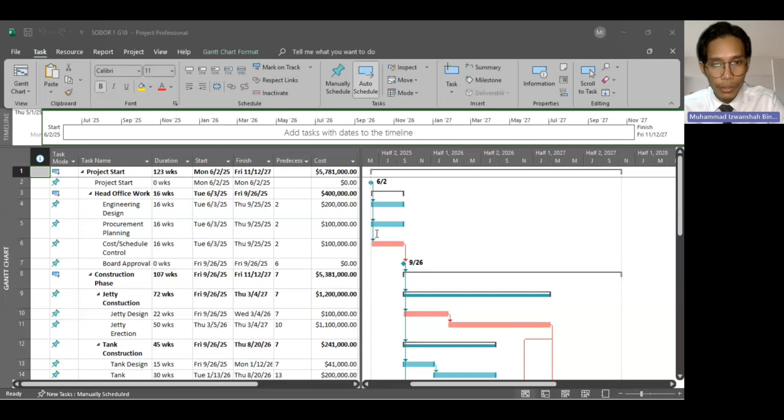The oil depot will be built near Creek Ronan, a location chosen for its deep water sea lane, which allows easy passage for the tanker. The depot will include 3 terminals for loading petroleum products onto road tankers, with separate facilities for premium petrol, regular petrol, and diesel.

Key components of the project include constructing a jetty, installing unloading arms, building storage tanks, and setting up a control room with computer facilities. We will also ensure the depot has all necessary safety equipment and a standby diesel generator for emergencies.

Our project plan will evolve over the coming weeks as we receive more detailed information on timescales and costs from suppliers. Initially, we will focus on creating a work breakdown structure and an outline logic network plan using MS Project. We will also evaluate vendors and confirm our project purchasing strategy. Our goal is to produce a comprehensive project proposal report that summarizes the schedule, cost, and any challenges we face.

So for Sodor 1, I'll be explaining. The total weeks that we get for Sodor 1 is 123 weeks. It's quite long, and this is our planning for the project.

The project will start on the first Monday of June 2025, which is 2 June 2025. It will start with head office works, then continue with the construction phase. In this construction phase, we will have jetty construction, tank construction, civil works, and mechanical and electrical work, then piping works, continuing with firefighting, safety equipment, and painting work.

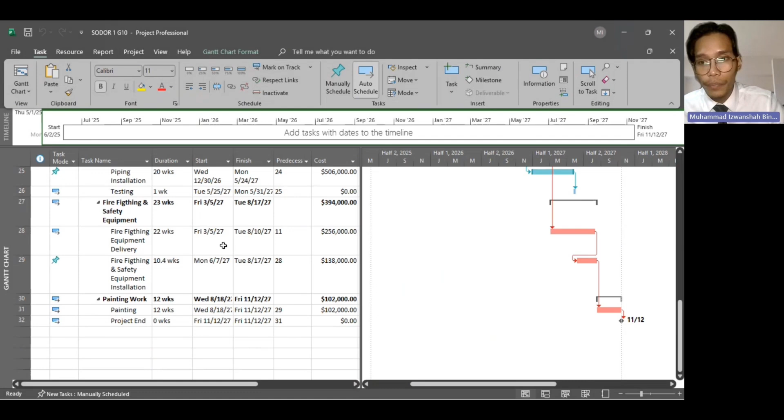This project will end on 12th November 2027. This is just the initial cost for our project. The total cost of our project is 5,781,000 pounds.

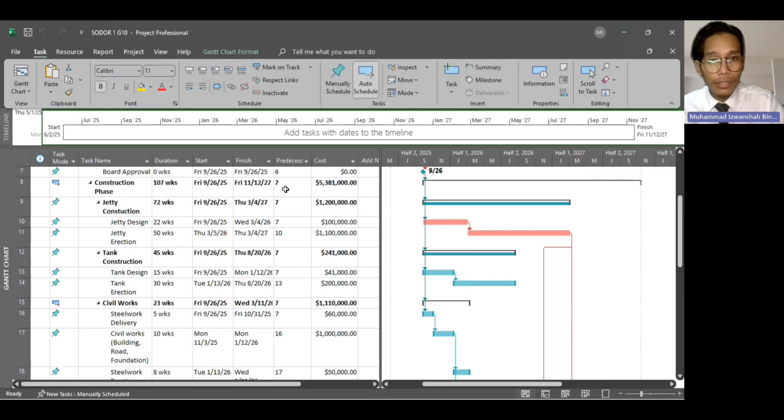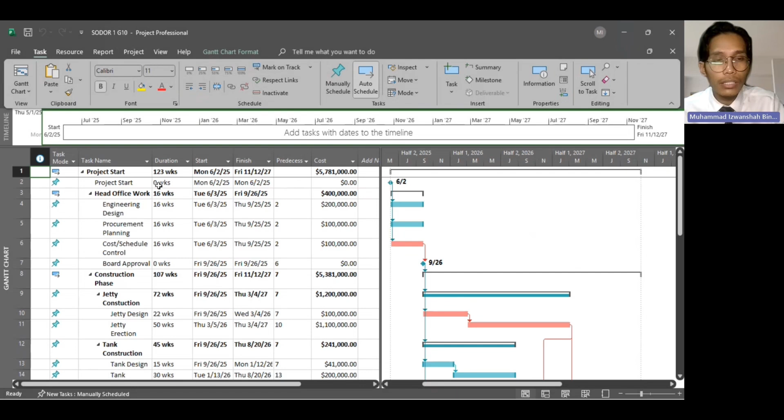The total cost is 5,781,000 for the total cost for Sodor 1. This is just a start for our Sodor project. I think that's all from me, and I will pass to Daniel for Sodor 2. That's all from me, thank you.

Thank you, Izwanshah, for your presentation earlier. My name is Daniel, I will continue with the Sodor 2 project case study, which is focusing on vendor selection, contractor evaluation, and resource management, which were all pivotal in ensuring the project's success.

The vendor selection process was systematic and based on 4 key criteria: price, delivery time, vendor rating, and geographical proximity. Each vendor was scored on these factors to ensure a balanced approach. For instance, Mitsui from Japan was chosen for pipes and fittings due to their cost efficiency and moderate delivery time of 19 weeks. Despite a vendor rating of 2, adjustments were made to account for delays, ensuring the project schedule remained intact. Stockist A from the UK was selected for instrumentation because of their excellent vendor rating of 4, outweighing their slightly higher costs.

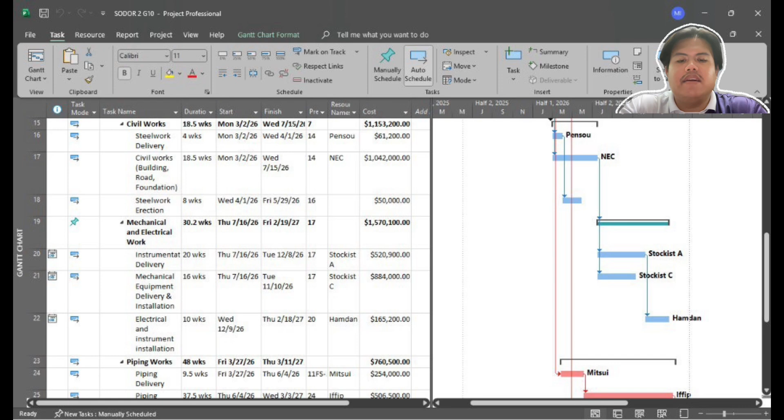Second, contractor evaluation. Contractors were also evaluated using a similar methodology. Key examples include Tankage CM12 from France, which was selected due to their top-tier rating of 4, reasonable cost, and manageable design and erection times.

JT-CCC from Greece was chosen for their competitive pricing. Despite a lower rating of 2, adjustments were made to account for potential delays, extending their erection time to 39 weeks. To maintain the overall 94.8-week project deadline, overtime was incorporated into critical tasks with additional costs and schedules carefully adjusted.

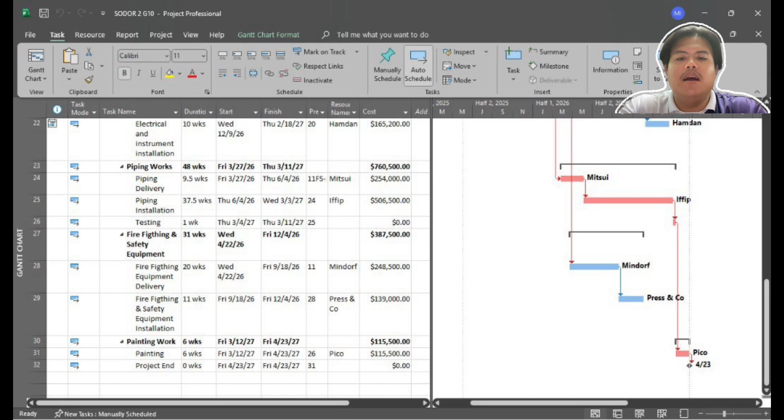Resource management. Effective resource management was critical for the project's success. For example, high priority tasks like piping installation required 3,000 hours of work and 1,500 hours of overtime to mitigate delays. Transparent documentation of overtime and vendor decisions ensured accountability and provided a reference for future projects.

In conclusion, the Sodor 2 project exemplifies how a structured approach to vendor and contractor selection, combined with effective resource management, can lead to the successful execution of complex projects. This process not only ensures quality and timeliness, but also establishes a strong foundation for future initiatives.

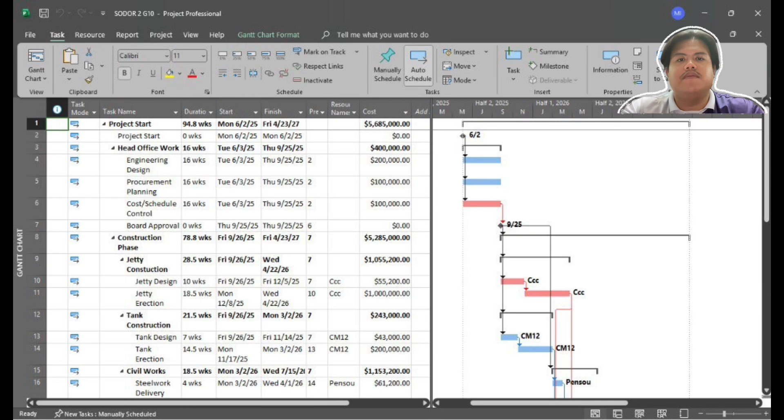To keep the project on track, the project plan and cost model were updated based on new information from the purchasing and procurement department, ensuring better accuracy and efficiency.

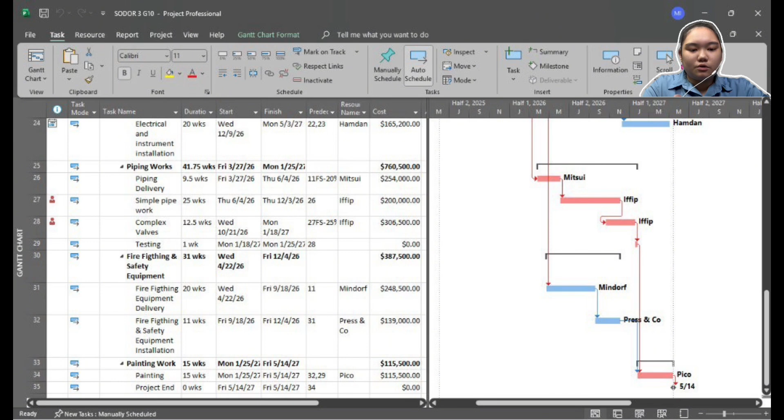Iffip Japan was selected for the installation of plumbing and piping equipment due to their expertise, with the works optimized to reduce the simple piping installation time from 50 weeks to 25 weeks, and the complex piping from 25 weeks to 12.5 weeks.

Next, NEC Spirus was chosen to handle civil works such as building tank foundations and structures, aiming to complete these tasks in 98 weeks without excessive overtime, thus saving and reducing costs.

The allocation of work hours and overtime was carefully planned, with overtime used strategically to keep the project on schedule without compromising quality.

The revised project plan improved time and budget management, ensuring the project progressed smoothly.

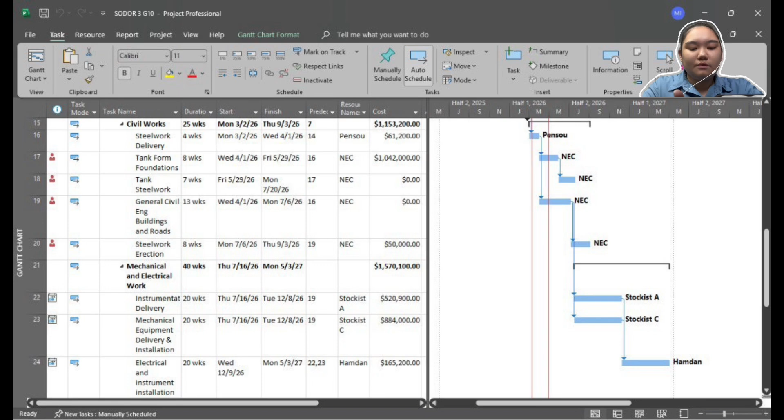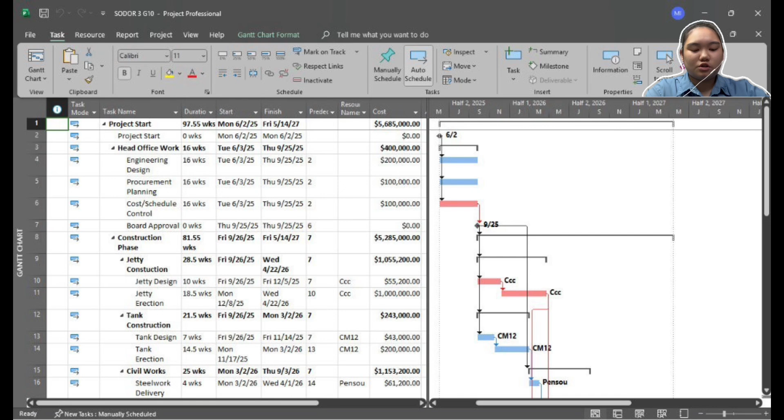To summarize, the revised project plan and cost model give us a more accurate and efficient approach to managing the timeline and budget. Choosing Iffip Japan and NEC Spirus is therefore part of our strategy to improve the efficiency of resource use without sacrificing quality. Adding overtime now helps refine further works to ensure that the overall work proceeds according to schedule and budget.

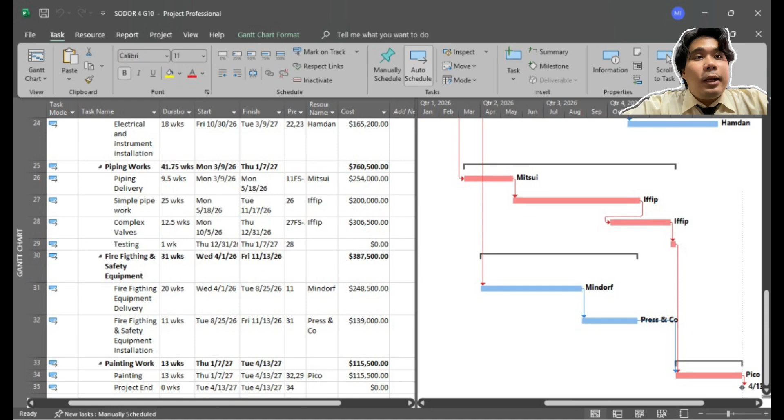In Sodor 5, currently it is week 45 on the project. There have been some changes in the material delivery schedule and project timeline. First is electrical delivery. Our vendor is Stockist A with a rating of 4. The delivery time has been reduced by 5 weeks, from 20 weeks to 15 weeks.

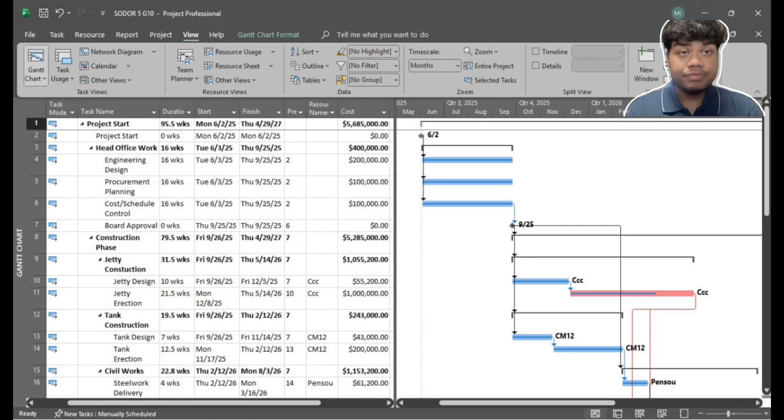Second is mechanical delivery. Our vendor is Stockist C with a rating of 4. Delivery time has also been reduced by 5 weeks, from 20 weeks to 15 weeks.

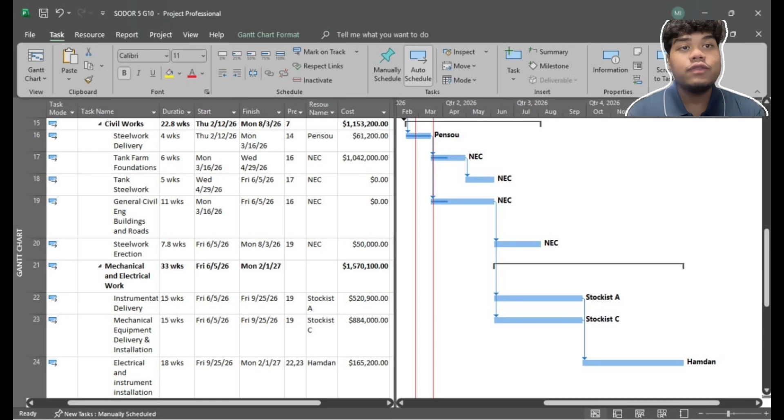Third is piping delivery. Our vendor is Mitsui with a rating of 2, and the delivery time has increased by 2 weeks, from 9.5 weeks to 11.5 weeks. In Sodor 5, there are also changes about the jetty erection activity. The contractor for this activity is CCC with a rating of 2, and unfortunately there has been a delay of 6 weeks, extending the completion time from 15.5 weeks to 21.5 weeks.

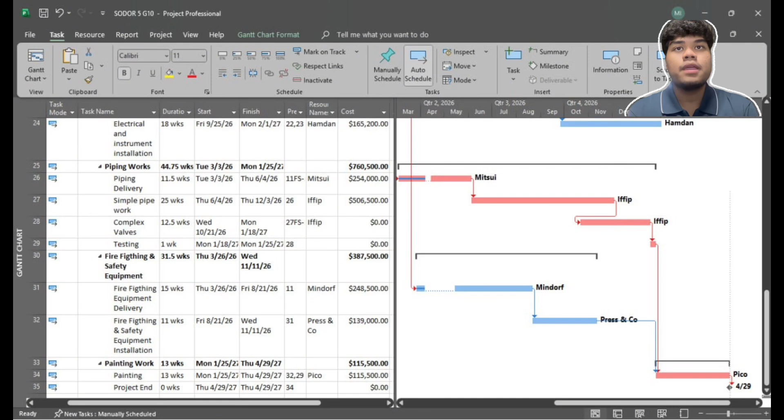That's all. All other activities not mentioned are progressing according to the original schedule and budget.

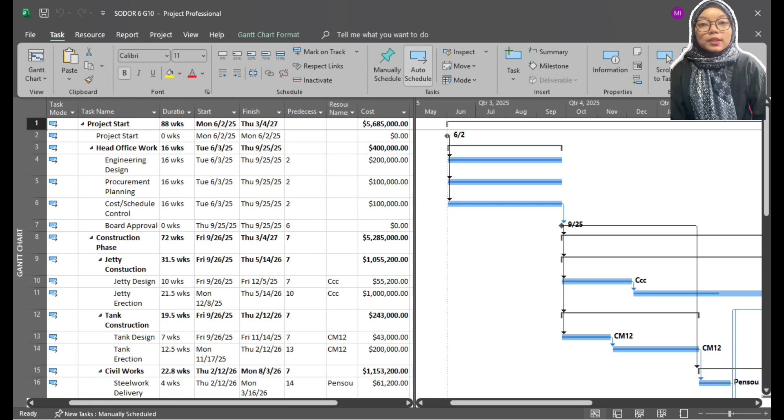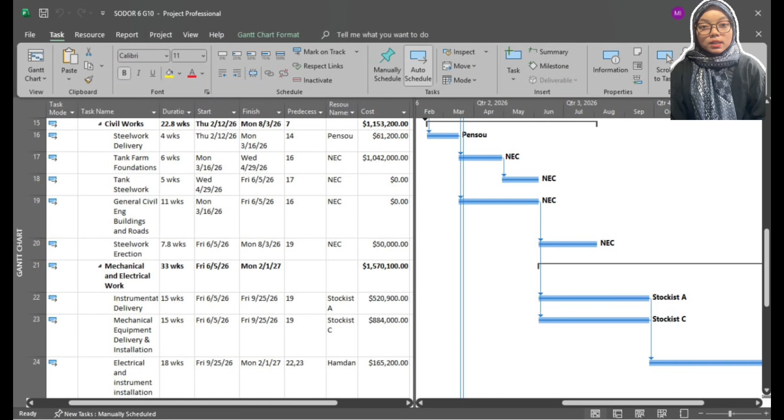For the complex pipe installation, the supplier was equipped with a performance rate of 3. The original planned duration was 12.5 weeks, but this was reduced by 2 weeks, allowing the task to be completed in 10.5 weeks. This adjustment also contributed positively to the overall project timeline.

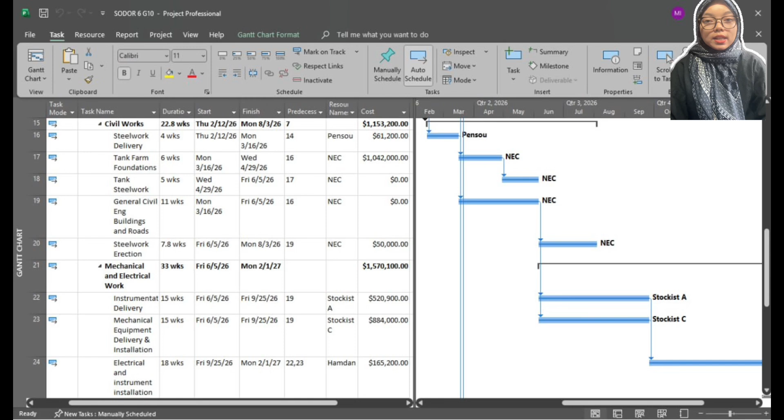In conclusion, after all adjustments, the total project duration remained unchanged in terms of cost, and the entire Sodor project was successfully completed in 88 weeks, meeting the target deadline. Additionally, due to the timely completion of all tasks, our company earned a bonus of 160,000 euros.

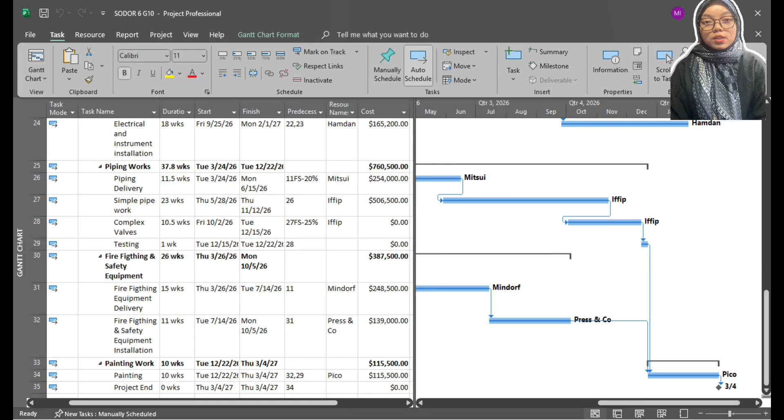So I will present about our Revit.

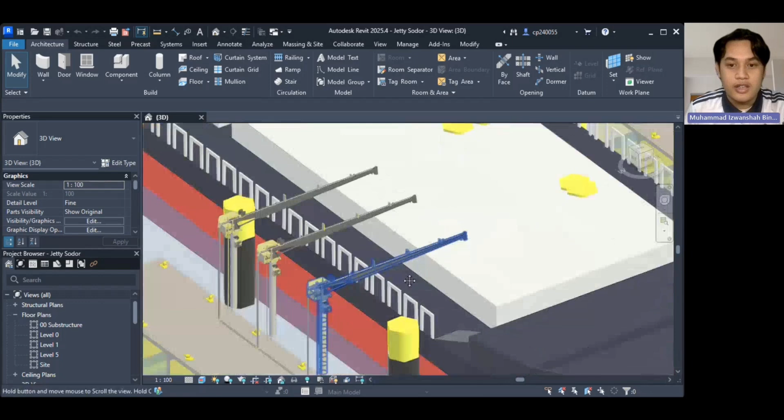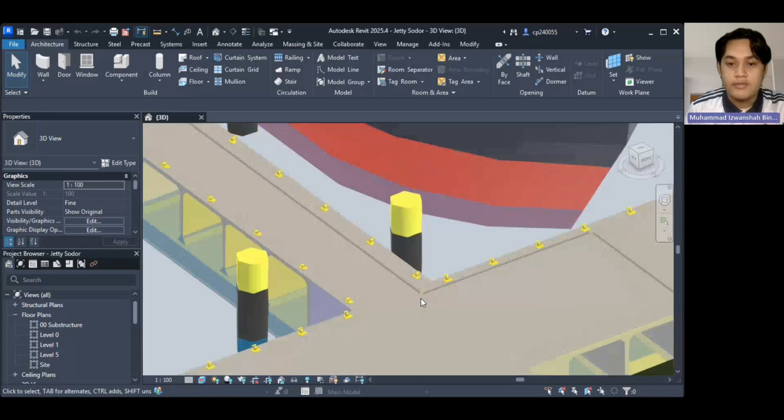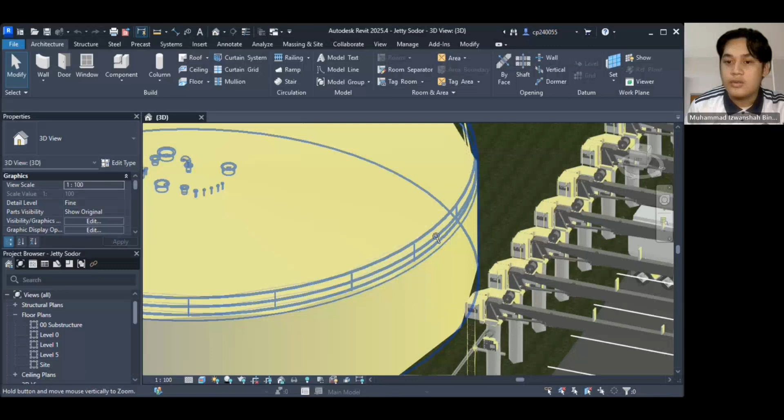So this is our Revit. The element type is loading arm. The loading arm is used to unload the oil from the oil tanker. Then we have mooring fins to moor the tanker to the right position, and then we have a jetty. The pipe runs from the loading arm to the oil tank, and then the pipe from the tank goes to the loading arm, and from the loading arm to the lorry.

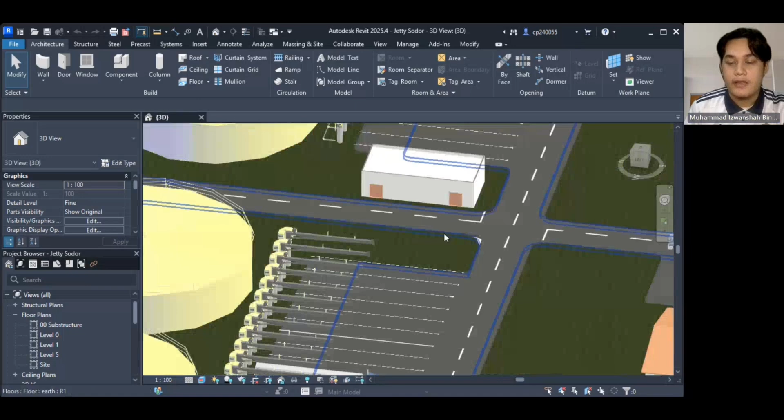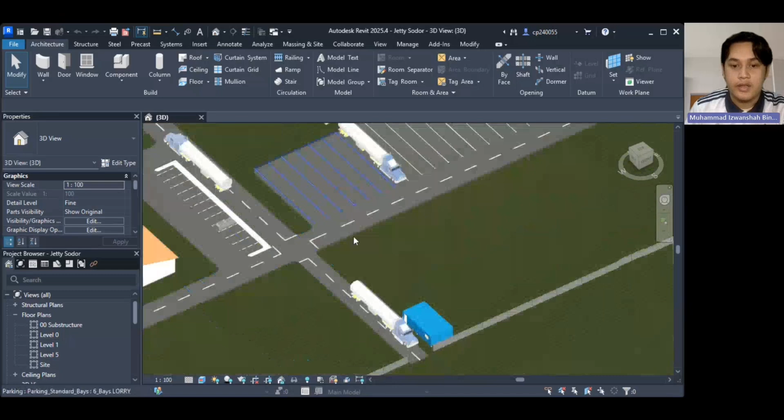Next, the control room. The control room is used to control any system in the loading arm and oil tanker. We also have an office for the tank workers, about 10% of the workers. We have a maintenance shop for maintaining trucks, and a security guard with fencing, and lastly we have a train station with the railway.